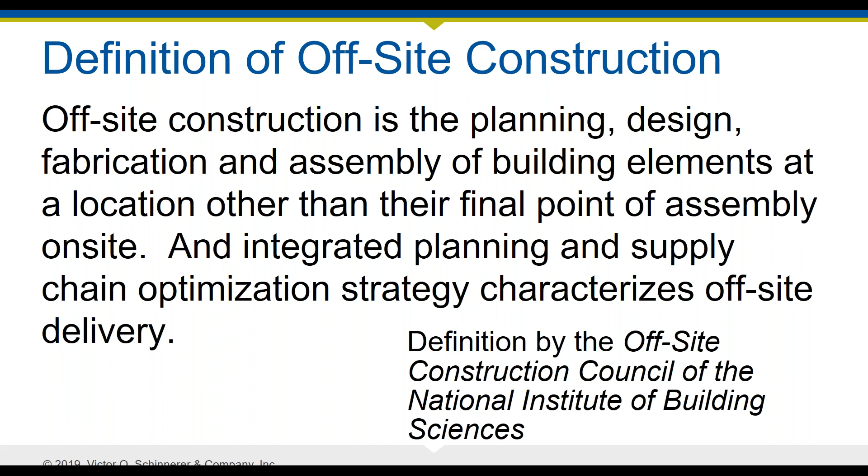For years in the construction industry, there was a reliance on cheap immigrant labor, often illegal immigrant labor, that masked inefficiencies. It was cheaper to use that level of labor rather than investing in productivity. But with the constraints on cheap labor and the shortage of skilled labor because of the construction boom and the lack of investment in skills programs, contractors now face real difficulties.

Now there are investments being made to raise productivity rates. You probably see every day there's some announcement of yet another investment in another system to help in the construction process. And off-site construction is just one of those things that contributes to the new emphasis on productivity.

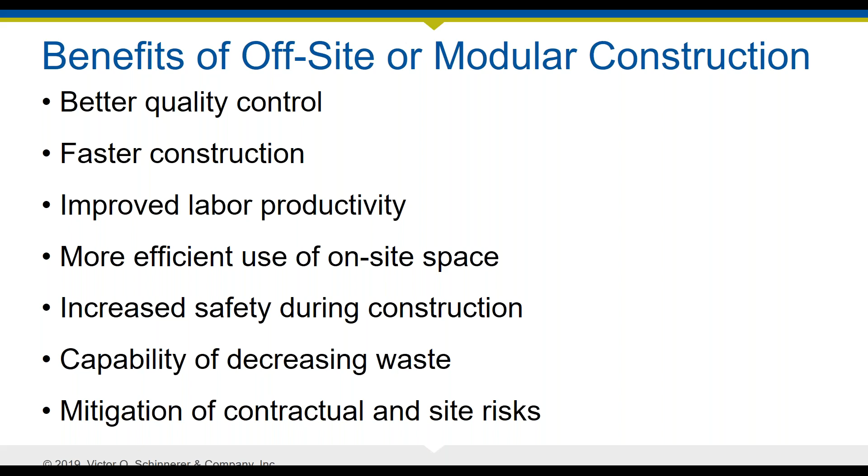Here's one of the major studies of modular construction. That is a term we will usually use, but there are many aspects of that that really change, whether it's modular, prefabricated, manufactured, or another variety of off-site construction. There are differences in techniques, codes, and legal treatment that would take a whole webinar to explain.

If you look at this, it talks about faster and cost savings. Most examples of off-site construction have produced faster projects. That's because you're doing more activities at the same time. Is there a cost savings? Right now, there's probably a cost savings, again, in reduced waste and, of course, reduced time, which affects everything from the construction loans to the insurance during construction.

There are challenges in design, manufacturing, and technology because you have to integrate this off-site activity with the on-site construction activity. Note the reference to the Scandinavian use of modular construction for housing. Most cruise ships are manufactured there, and many of those same companies now create modular housing for land the same way that they make modular units to plug in the ships. And even IKEA is part of the modular housing construction effort.

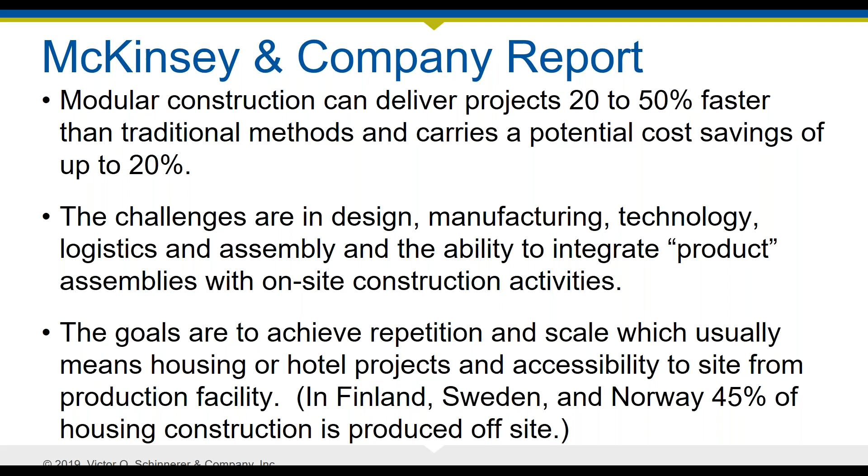These points are why Marriott is using modular construction to build hotels. Right now, a new hotel in New York City of 26 floors is the tallest prefab building in the United States. But as Marriott and its suppliers learn more, we will probably be seeing fewer stick-built or bespoke projects from Marriott. They will be designed from a kit of parts and assembled using off-site built elements.

As you probably know, if you delegate the design of MEP services to the contractor, the mechanical contractors have been using 3D design tools for many, many years now, and now they are increasing their ability to really bring pre-constructed elements to the site. And the last note, at that point, mining advanced analytics, studies have shown that even with a duplication of materials, modular construction can increase productivity and lower on-site costs significantly.

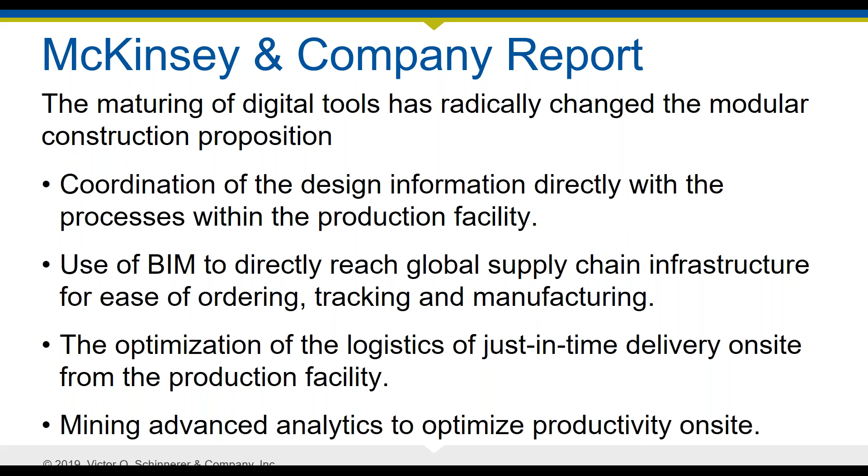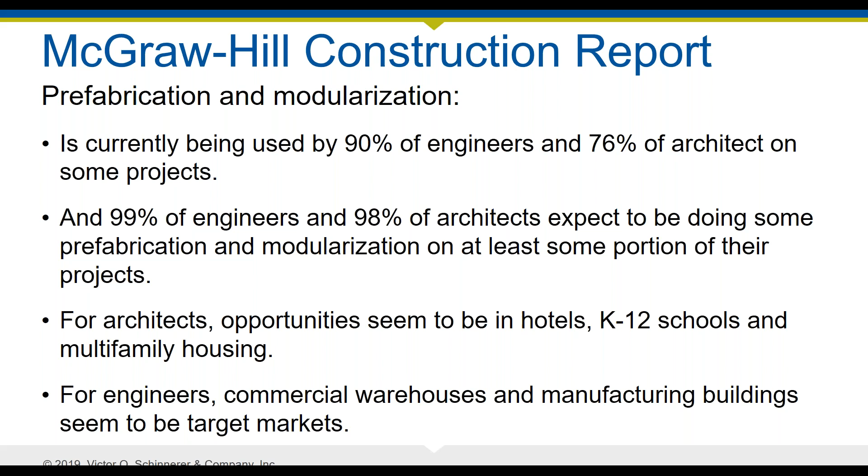Another forecaster is McGraw-Hill. I think this survey overestimates the use of prefabrication and modularization, but it is very clear that the trend will only increase unless, of course, the industry even skips over the idea of off-site construction and modular construction is replaced with on-site robotic construction and 3D printing.

Some of our policyholders already have expressed a concern that between BIM and off-site construction, design decisions will be taken away from licensed design professionals in independent firms and transferred to integrated contractors and program managers who really assemble rather than construct capital asset facilities. This is not an unrealistic concern.

As design-build continues to grow, as it becomes legal for more types of projects, and the single point of responsibility becomes even more attractive to clients, other parties, whether they are design-build entities or even finance, design, build, operate management companies, maybe large accounting firms or foreign manufacturers, will increasingly control design. That's a credible fear.

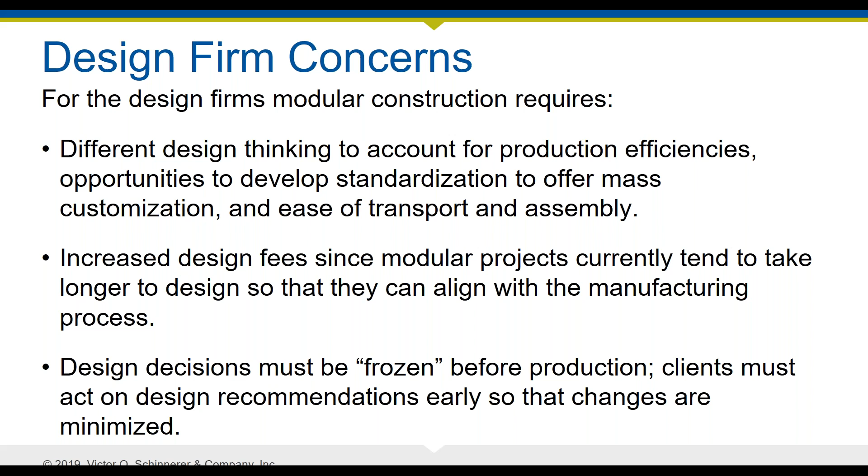Some major design firms and some smaller ones that work on housing projects already have developed their own library of modules. And if they can keep their fees high while using the modules, they can be highly profitable. What we may see is that owners become accustomed to a reduction in design time through the use of modules and are not willing to pay the higher fees for that. And in fact, as we've seen with CAD and even with BIM, firms often get into a situation where their compensation is reduced as they become more efficient, and that really makes it difficult to press for efficiency.

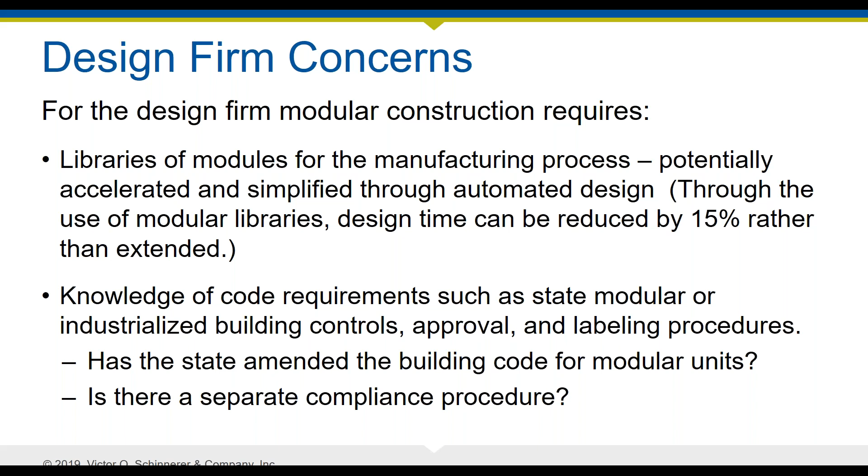Part of the switch to modular construction is to understand how codes and standards apply to off-site construction. In many states, there might be different laws affecting manufactured housing, for example, or the industrialization of design elements. Some states have special inspection procedures and certification requirements for those building off-site elements of a construction project. And most design firms are unaware of what those certification programs or special inspections really are. So you have to be concerned: in your state, has the state amended its building code for modular units, or is there a separate compliance procedure?

And besides knowing the appropriate codes and standards and inspection and certification procedures, firms need to know their roles in the process. Contracts with design firms should be specific as to the role of the design firm in monitoring off-site construction and the quality of the modules being built for the project. In fact, the American Institute of Architects right now is working with a number of organizations on how to deal with this from a contractual basis.

The contract obviously should clearly spell out if the design firm has a duty to examine modules during the prefabrication process. Normally, a design firm, as one of its many roles, is really a representative of the owner during the construction process and out there on the site evaluating the quality of the work of the construction team. But how does that apply when the parts of the project are being constructed off-site?

And is it different if a contractor is building modules off-site, or if they are defined by the contract as materials and supplies? You know, you could have a subcontractor simply shifting much of its work off-site, or you could have a separate company building modules as products.

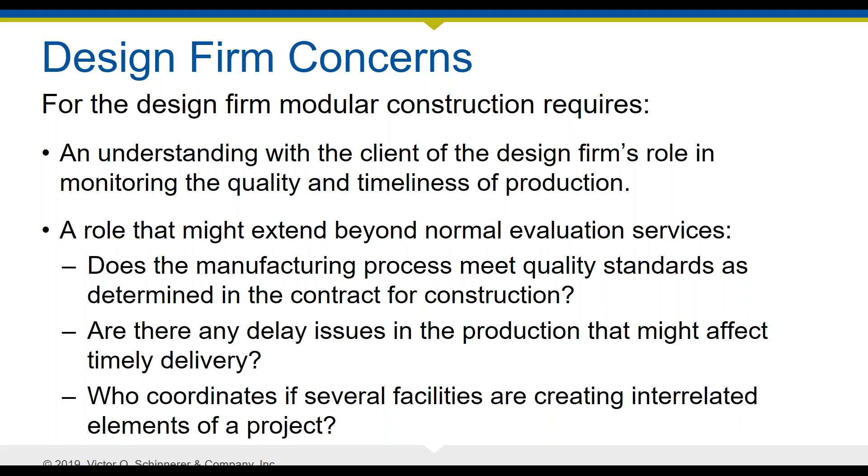So that brings us to some key legal issues that could apply in off-site construction. And since insurance coverages are based on known legal liabilities, how professional liability insurance might or might not cover the off-site element of the construction of a capital asset.

Now, how building codes affect off-site construction can vary. For the most part, however, standard building codes do not control the design and construction of off-site modules that are considered industrialized units. There may be different rules for their manufacture. There may be state-specific building standards for that.

In addition, product liability law, which broadly refers to the legal responsibility for injury or damage resulting from the use of a product, might apply, and product liability is not covered by professional liability insurance. That's an entirely different part of the law. The legal codes or doctrines may apply the Uniform Commercial Code, which applies to the sale of goods.

Product liability law is really a strict liability idea that once you put a product into the mainstream of commerce, you're responsible for that, and it's not simply based on negligence, it's an absolute liability. And there are different statutes of limitations and repose that would apply if modular units were considered products rather than simply another way of constructing the specific project.